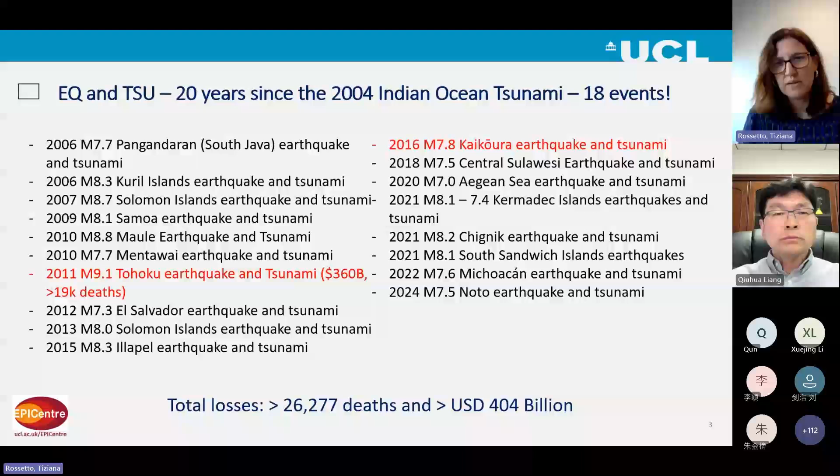So the structure of the talk today, we're going to go through some of the basics of tsunami engineering, because not a lot of people know this. So what are the tsunami actions on buildings? What is their size, their distribution? How do we analyze buildings for tsunami loads? And then exploring the relationship between earthquake damage and tsunami response. And finally, some of the implications towards both earthquake and tsunami design.

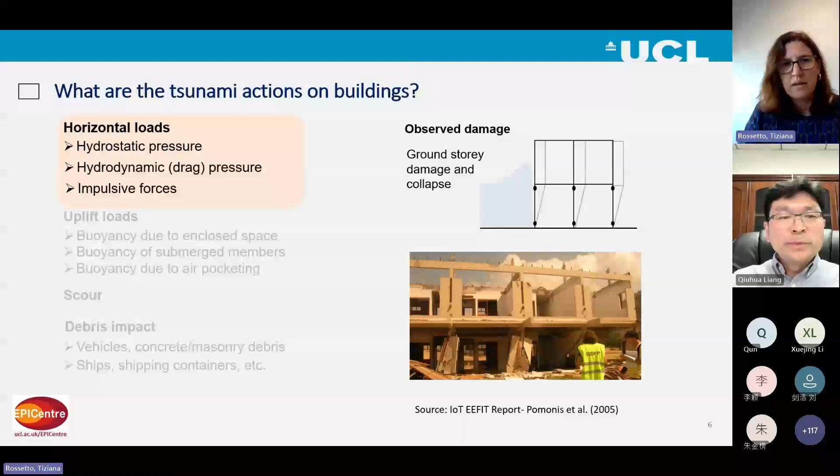So what are the actions from tsunami on buildings? We can roughly split these into 4 categories. The first category is horizontal loading. The horizontal loads are imparted when the tsunami flows pass by a structure, and these are hydrostatic pressures, hydrodynamic or drag pressures, and sometimes impulsive forces. We also get uplift forces in water, clearly due to buoyancy, and this buoyancy can be due to there being air pockets effectively within the structure. And when these form, then the structure is subjected to these upwards forces or uplift forces.

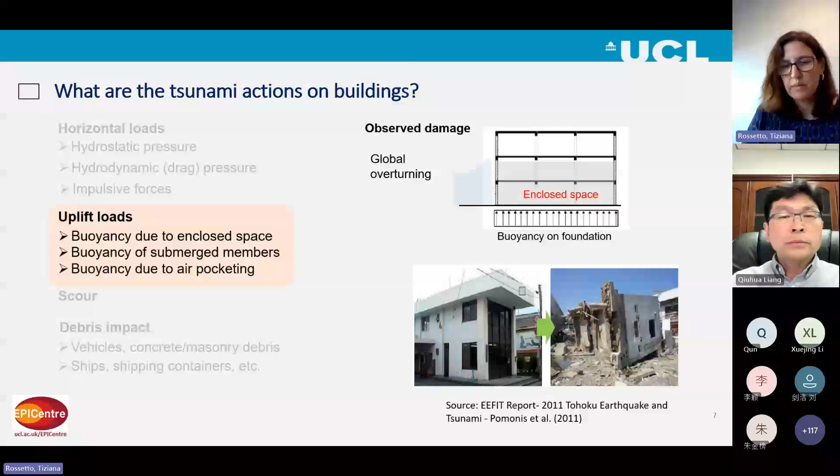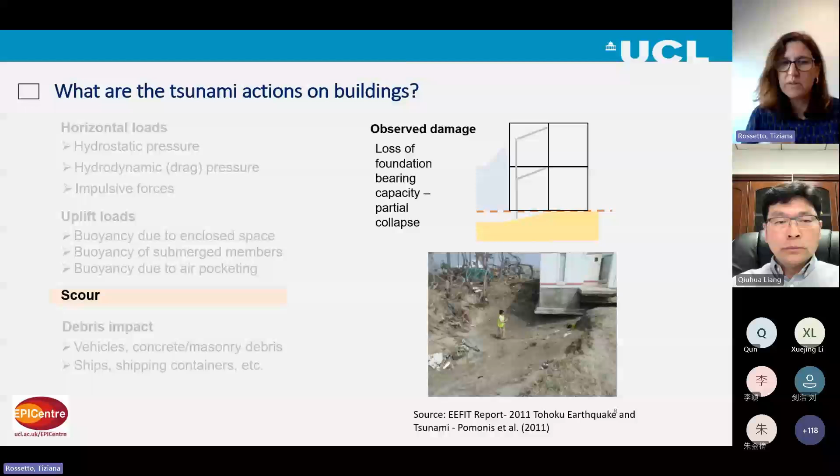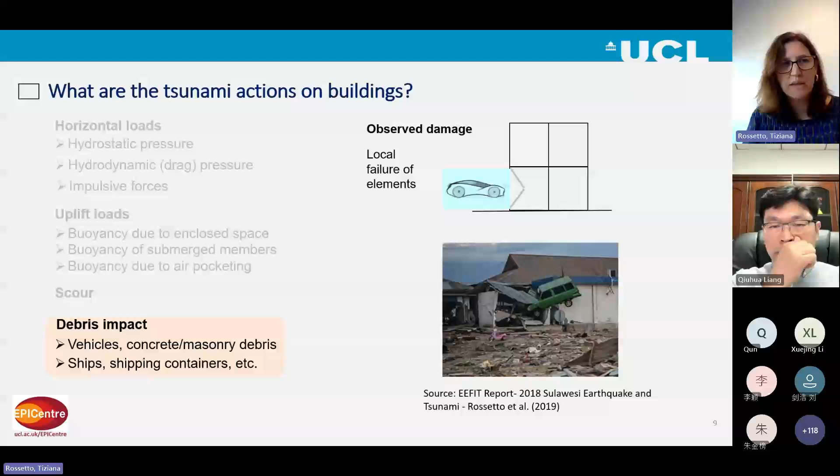In the field, post-tsunami, we often see that the corners of buildings are no longer supported by soil, and that's because that soil is scoured, entrained away by the flow, particularly around corners where you have very high velocity flows passing the structure. And finally, within a tsunami, there can be debris carried, which again can cause damage, either the damming of spaces, or large objects such as vehicles or boats hitting the structure directly. I'm not going to be talking about scour and debris impact moving forward, but I will be touching upon the other types of forces, the horizontal loading and the uplift loading coming from tsunami.

But what I found returning from the field in 2004 was that very few facilities worldwide existed for the simulation of tsunami in the lab. And those that existed didn't necessarily represent tsunami in a realistic way. So I partnered with HR Wallingford, and with them we have developed some new tsunami testing facilities and a new way of generating tsunami. And over the last 20 years, effectively, we have developed 3 testing flumes within the HR Wallingford complex where we can simulate tsunamis.

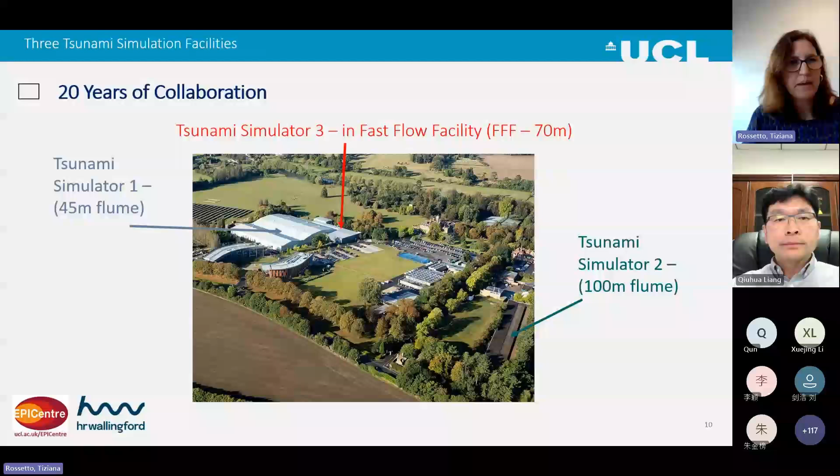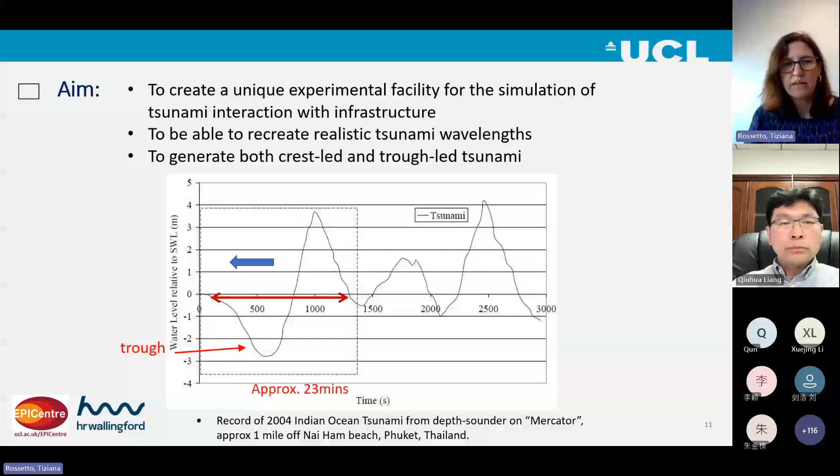But of course, as it enters the shoreline and the coastal region, that wave height can increase through shoaling. But this length, this wave period, is something that other facilities were not able to generate at the time when we started doing our physical tests. And with Wallingford, what we did was we designed a new type of tsunami simulator.

And all it is, is a glorified tank. So it's a big tank that sits at the end of a flume, and it has an air pump that pumps air out of the tank, and a control valve which allows the air to flow back into the tank. So if you close the control valve and you're pumping the air, then you are lifting the water within the tank. And as the water rises within the tank, you're creating essentially a trough outside of the tank. And then as you allow air to ingress back, so you open the valve, you allow air to ingress back into the tank, the water level lowers. And in that case, you are creating a crest.

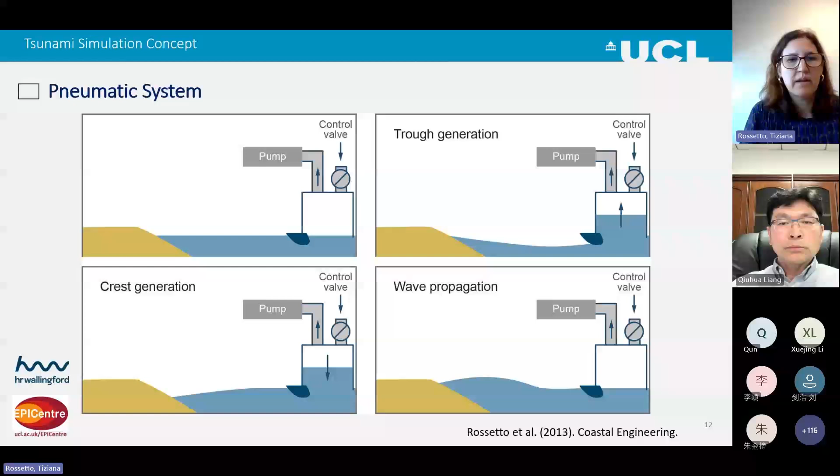And these waves that are generated flow along a flume and inundate the land. So it's a very simple system. It's basically lowering and raising the water level within the tank to essentially create and start these waves running along the flume. The flume that we're doing tests in, or the largest one that we've adopted so far, is 70 meters long and 4 meters wide. So this is a diagram because I couldn't take a picture of the entire flume itself. And on one end, you have the tsunami simulator, this tank. And on the other side, you have the test bed, essentially where we are measuring and looking at the interaction between the inundation of the tsunami flow and the structures or the defenses or other aspects.

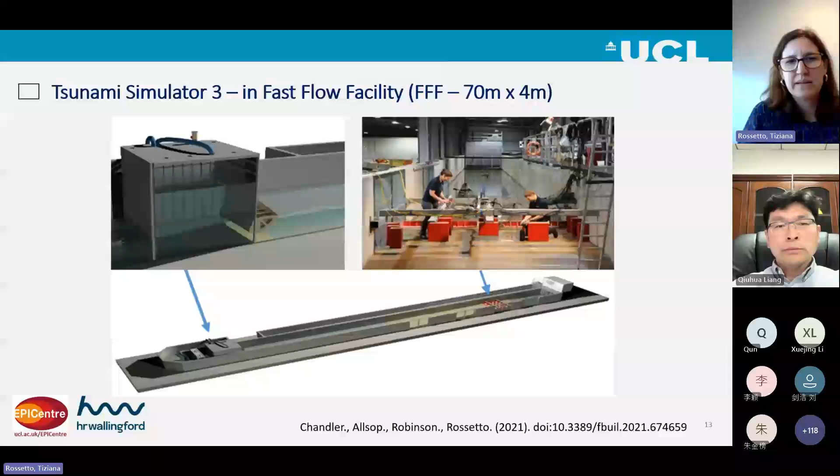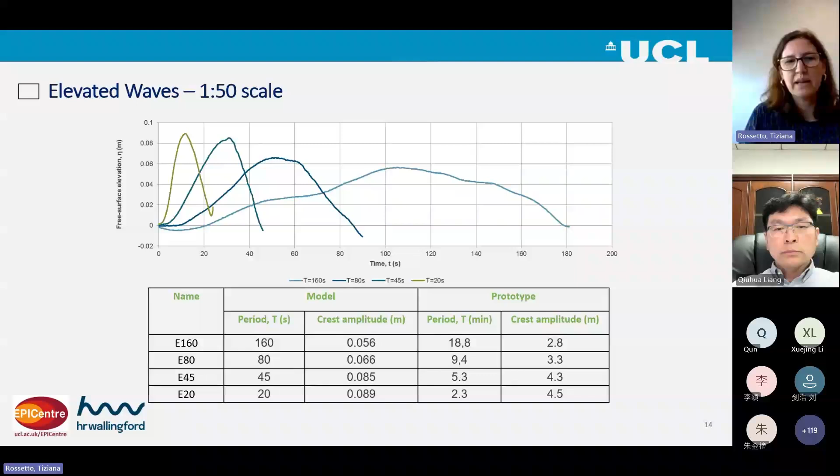And what we are able to do is generate through the system very, very long waves. So these are some images of crest-led waves. So we've only got a positive crest for the tsunami. And we can reach periods of 160 seconds in the flume model environment, which corresponds to a real tsunami of around 18.8 minutes in real life. And we're working at a scale of about 1 to 50. We are also able to generate these trough-led waves. And again, here we're actually reaching wave periods of around 240 seconds, or approximately a 28-minute tsunami, which was, if you recall, the length of the Mercator wave, which I showed you before.

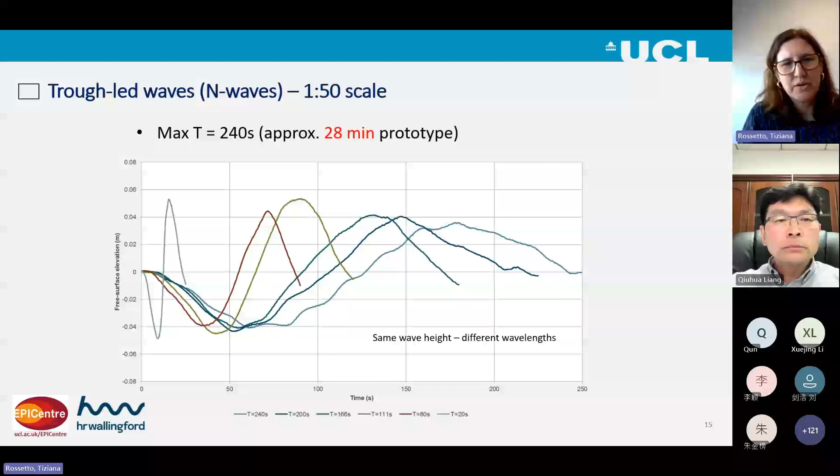We're able to accurately control the wave because we have a control system that dictates how high and low we raise the water, etc. So we've also tried to recreate real tsunami traces. So the top image shows the Mercator record that I showed you before, and how we simulated it. The red is our simulated record in the flume, and the bottom image shows you also the Tohoku tsunami trace that was measured, and our ability to simulate that. Note that there's quite a jump there in crest, etc. So we have a good control over simulating tsunamis. So tick, we solved the problem of simulating tsunamis.

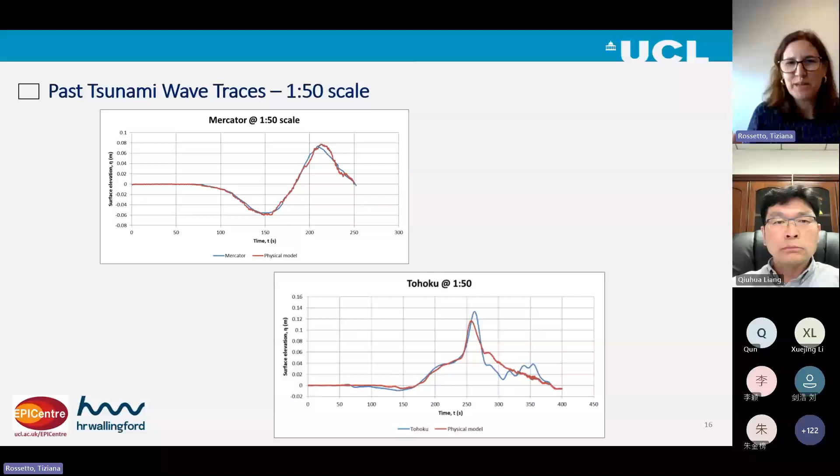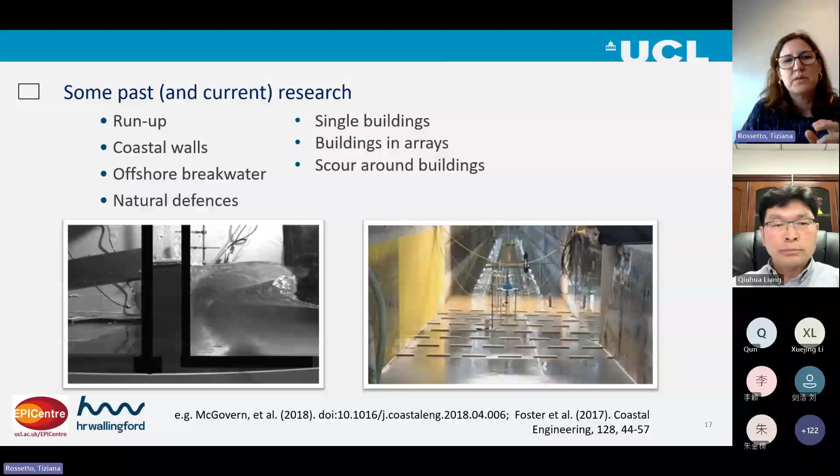What have we done with that? Well, over the years, we have essentially investigated several aspects of tsunami interaction with the coast. We've looked at run-up, which is a measure of seeing how far the tsunami goes inland. We've looked at how coastal walls can be used to react against tsunamis or defend. We've looked at natural defenses more recently, and scour around buildings, and I'd like to focus today on really some of the tests that we've been looking at on buildings themselves, because that's what has helped us understand how tsunami flows interact with the built environment.

I'm going to show, and hopefully this will work, and it won't be a total disaster. There we go. A video of some of the tests that we conducted in 2018. This is a row of buildings protected by a seawall, and the seawall breaks. The flow coming in is a tsunami of around 50 seconds in the flume. So it's not one of our longest tsunamis, but you can see that the water keeps coming and coming and coming and coming and coming.

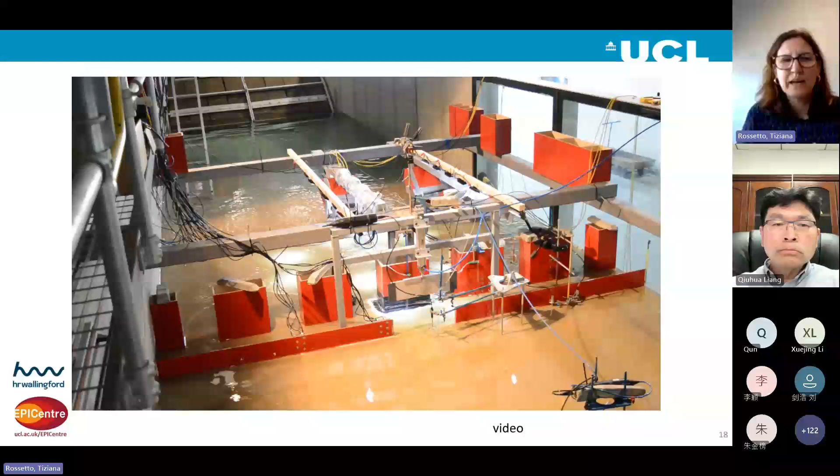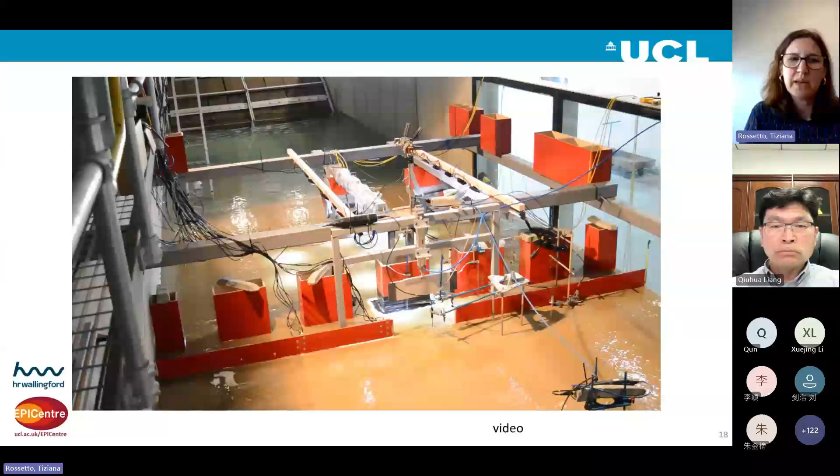And it just shows you a little bit the ability of the facility to really simulate those long period waves. You can also see there's a lot of cabling, and that is because we are monitoring the structures in different ways. We're looking at pressures, we're looking at loads, and that has given us a number of profiles of what the loading on structures looks like from tsunami.

And what we found was that actually what was assumed in the codes of practice is not actually what we recorded. So in the codes of practice, the assumption is that the tsunami wave arrives at the structure, it hits the structure, causing a large impulsive load, okay? And then as the flow sort of stabilizes around the structure, you have a quasi-steady component or pressure that is acting, that slowly goes away as the flow passes the structure. In our tests, we don't see the impact at all. We don't see that massive spike at the beginning, but rather we see a bit more of a gentle rise and lowering of the forces.

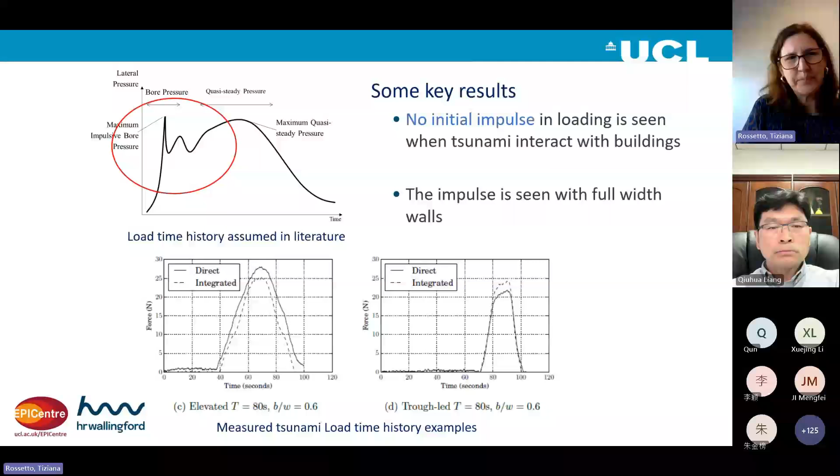And this is because the assumption made with this big impact force is an assumption that comes from looking at flows interacting with walls that are full width. Okay, so they fully stop the flow. So you get this initial impact because the flow is stopped fully. However, structures, buildings don't stop the flow completely. The flow tends to flow around, and particularly as the tsunami is a slow rising flow, I mean, it's fast, but it's almost quasi-steady, then you don't see that impact, but rather the water passes by the structure or is able to go past it. And we've used some mathematics to basically show that actually the tsunami flow around a building are quasi-steady.

And we've developed, to go with that, some very simplistic relationships for predicting what the forces from tsunami flows are on a structure, where we take into account the blockage ratio of the buildings, which is essentially the urban density. So how much does a building block the flow? And we also take into account a drag coefficient, which is a typical thing you would have within any flow around an object type of analysis, and the Froude number. And with these three parameters, we can basically estimate for any height and velocity what the forces are going to be on the structure. So we've tried to develop an engineering type of tool, a simple calculation that can be used for estimating the forces.

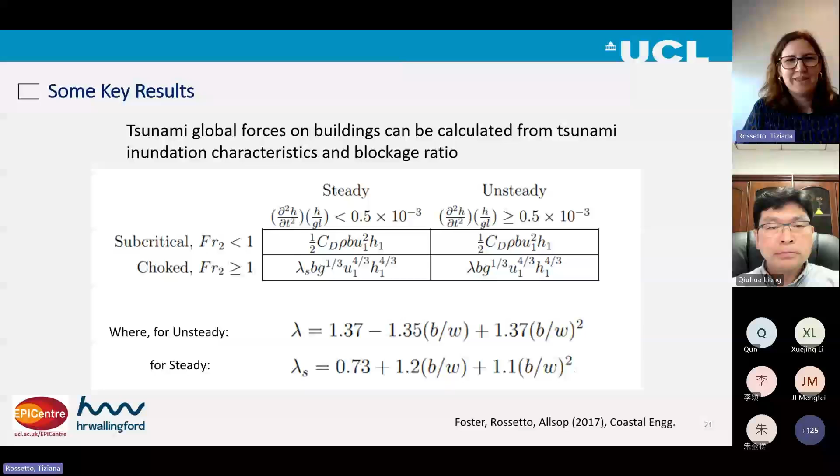So great, we now have some forces. Okay, so how do we apply them to a building? And how will a building respond to these loads? Okay, so that's another area that we have been working on a lot. And I just want to start to show you this figure.

Because what was expected at the time when I started working on tsunami engineering was, again, this idea that a tsunami loading was similar to the loading from an earthquake. Now, the loading from an earthquake is fast, it's cyclic, there are lots of cycles, and essentially the cycles are of large strength only over a very, very short amount of time, right? So each cycle is high frequency, so has a very low time of impact, essentially. Tsunami is totally different. A tsunami is a quasi-steady, long duration flow.

And so the concept of ductility that's used within earthquake engineering to resist earthquake loads cannot be used within a tsunami. So essentially what happens is the tsunami arrives at the structure and it pushes the structure and it continues to push the structure and it pushes and pushes. And when the structure yields, it continues to push. So the structure yields and it basically then collapses. And what we found mathematically is that once the structure is yielded under a tsunami, effectively, because the flow continues to push it, you get collapse straight away. And you cannot rely on the non-linear capacity, so that deformation capacity that we do in earthquake engineering, because once it's yielded, it's gone.

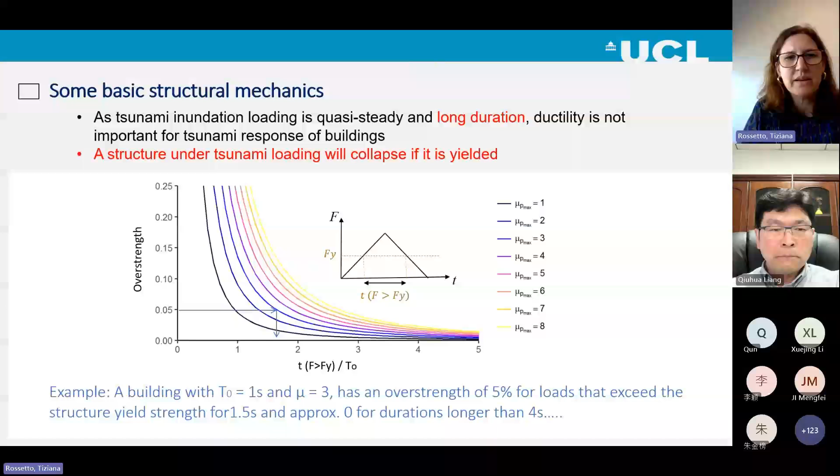In tsunami, what we did is we reversed the concept. So we started at the base and we said, okay, the flow starts at the bottom and rises. But essentially, if we think of it as a hydrostatic type of loading or similar, then we have a very similar sort of triangular distribution that we apply, but it starts at the bottom and rises up. The nature of these forces is that actually it induces a large shear at the base of the building and not the large moment that the earthquake does. And this is a key concept. So the response that we get under tsunami loading and earthquake loading is very different.

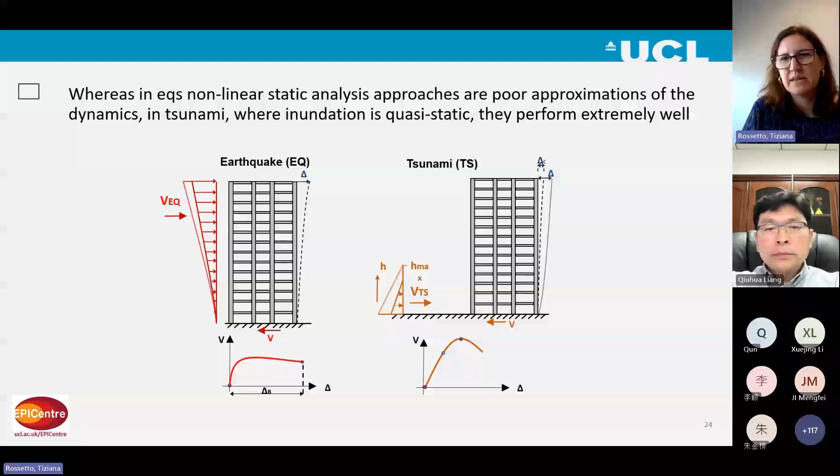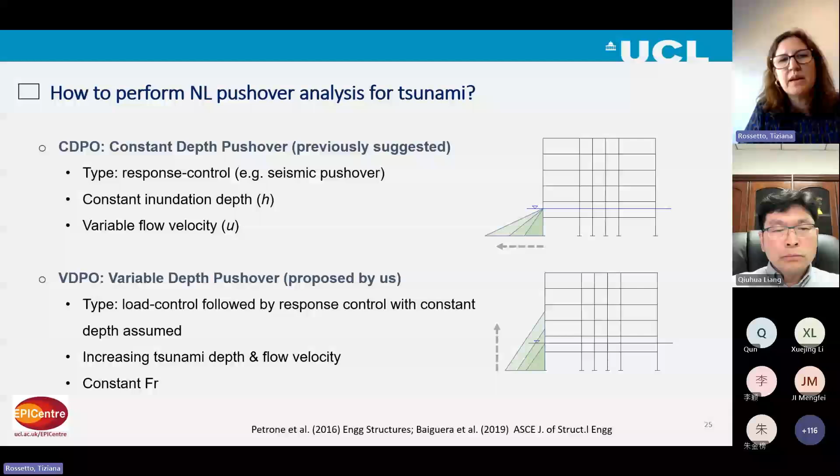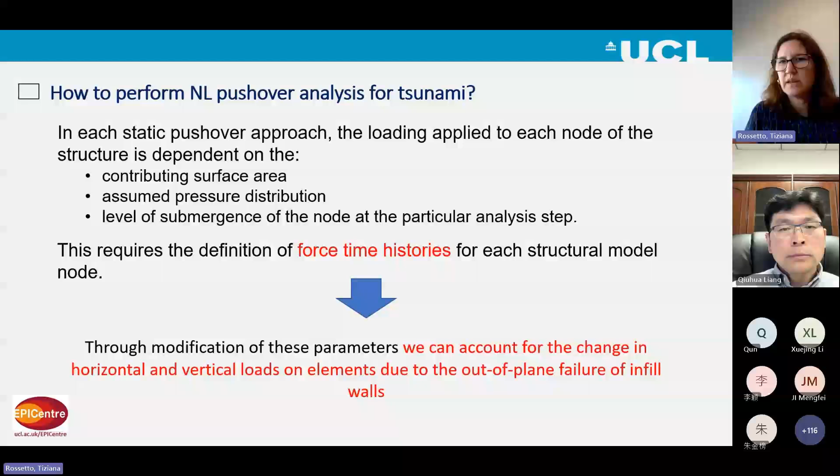We had to look at how do we apply the loading to the structure, because it's not simple. As you're raising the loads, you are activating new nodes. So you are applying forces to new nodes that didn't have any force applied to them earlier in the structure. So we discretize the load such that at each node you have a time history of forces. And the nodes that are higher up in the structure have zero force to start with, and then they start to attract forces. By having time histories of loading and discretizing the loads in this way, it means we can actually start to activate different nodes as they get inundated, both for horizontal loading, but also for vertical loading. So we can take into account the effects of buoyancy.

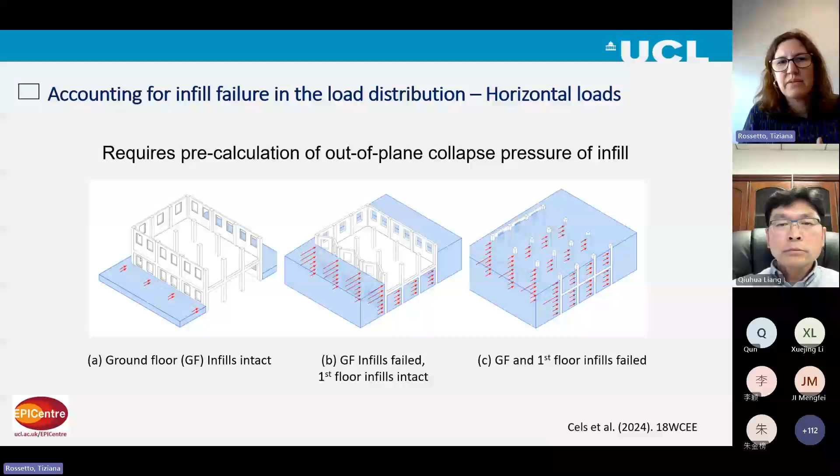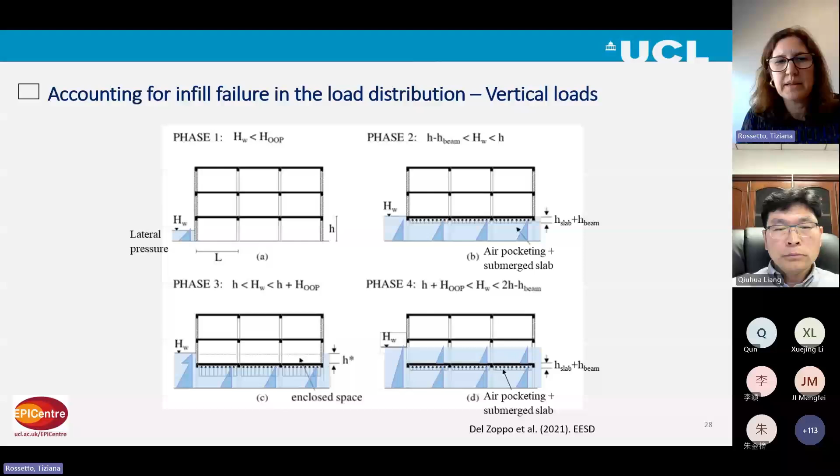If you look at the case of B, what we find is if the infill is still intact on the second story of the structure, while the bottom is inundated, you have now a big air void and very large vertical forces that are acting because you've got an air void engulfed in water, essentially. And until those top story infills collapse, then you're not releasing that vertical load. So we can take into account effectively the change of loading in the structure. So this is just another diagram to show how, particularly in the case C here, you have an enclosed air void, which causes very large buoyancy forces on the slab of the first story. And when you've got the collapse of the infill on the first story, then that buoyancy load basically disappears, and you get water flowing above as well.

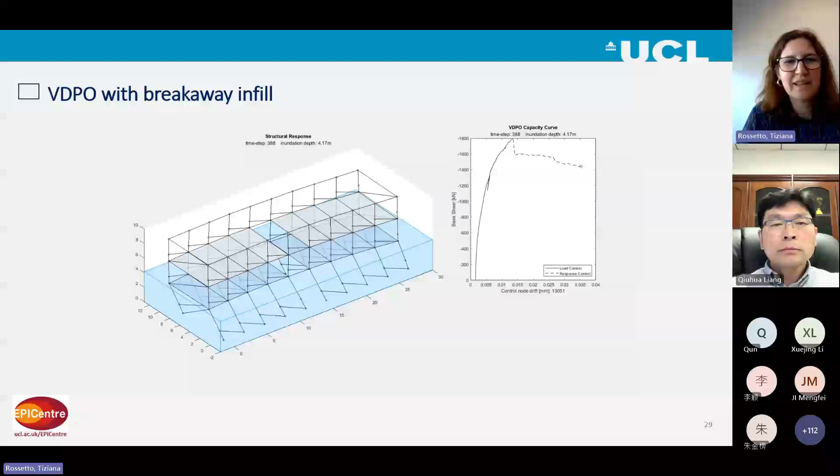This is just an animation of a simulation that shows you how a structure, and this is an infilled structure, a reinforced concrete structure, responds to a tsunami. And if I can set it going, what you can see is the water level is increasing. As that water level is increasing, the base shear on the structure increases. But you also have a point at which you have a drop. So if you see halfway up the curve, you get a drop and then a pickup again of force. That drop is the collapse of the infill, essentially, that is releasing loads and reducing loads on the structure. So it then continues to carry loading up to a certain level and then fails. You get this sort of abrupt drop in strength, and the structure continues to essentially lean over until it's failed completely.

What can we take from here? And sorry, I might have lost you on the way. I hope not, but let's summarize a little bit. Firstly, that non-structural elements are really important. So the infill walls, because of their large area, they attract a large loading from the tsunami flows. And so ignoring them is unconservative.

So we have to take into account the fact that there are walls that may attract loading, and because they attract loading, then pass that to the main structural elements. Because if we don't do that, then we're underestimating the loads. But it's also too conservative to not consider the fact that they may fail during the flow. And if they fail, they're releasing the loading and reducing the loading on the structure.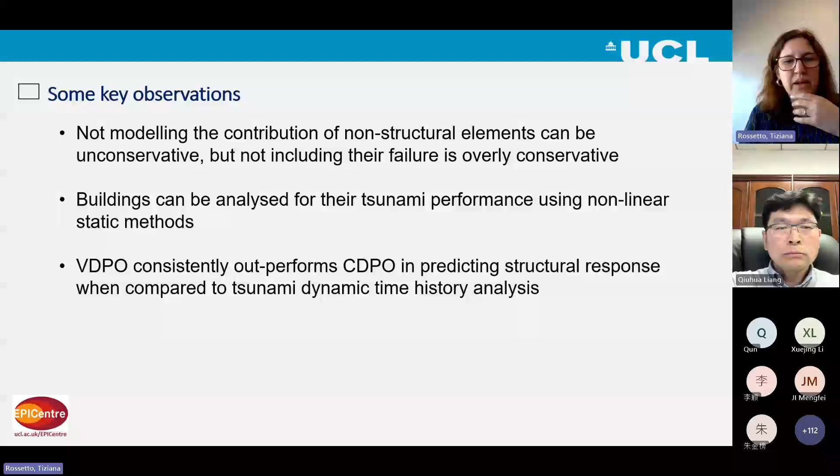We can use nonlinear static methods to analyze tsunami performance, and we can do that very well. And we can use something we call the variable depth pushover very well to do that. And this is an approach that we've developed and is now fully available. And another observation is the fact that if we use nonlinear static, this pushover approach for earthquake and tsunami, we get a very different response of the building.

So I mentioned initially having an earthquake pushover imparts a large moment at the base of the structure, okay? And that results in a lower base shear capacity of the structure, lower capacity to take horizontal loads, but the structure can deform quite a lot. In the case of tsunami, because the loads start at the base, they are eliciting a different response in the structure, much stiffer response, okay, and a much stronger response. So the structure is actually stronger under tsunami loads than it is under earthquake loads, but it is also not ductile. It can't take those large deformations.

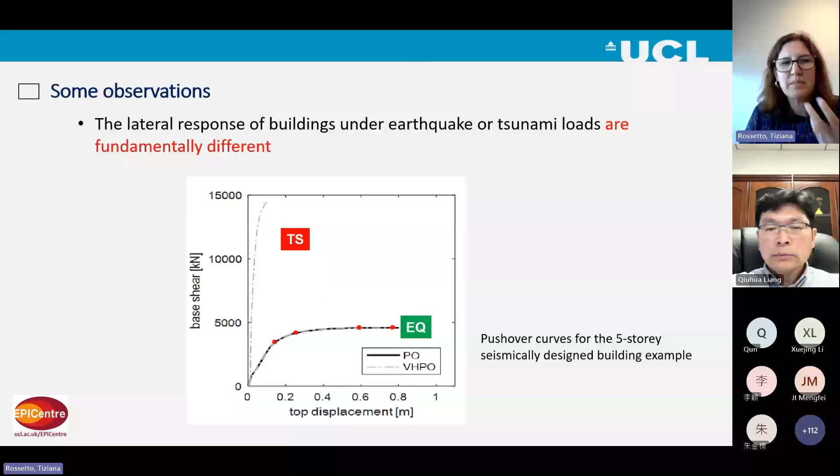Why is that? They're both horizontal forces. Well, effectively, they're quite different. They're fundamentally different forces in how they apply to the structure. So if we take into account this example with New Zealand football players, basically, a tsunami is on the left. It attacks the legs of the building. It attacks the legs of the structure. Okay, it attacks it right from the bottom, and it tends to basically unseat those legs. You know, it swipes the legs off their base. The earthquake instead attacks the top of the building. It tends to try and rotate the person, so it'll try and topple them over. Okay, so if we take that example, you can see that they're fundamentally different.

And the way that you are resisting those forces as a person is different. So the structure also is doing that. So we're looking at two quite different forces, both horizontal loads, but acting in a different way on the structure, on those bodies.

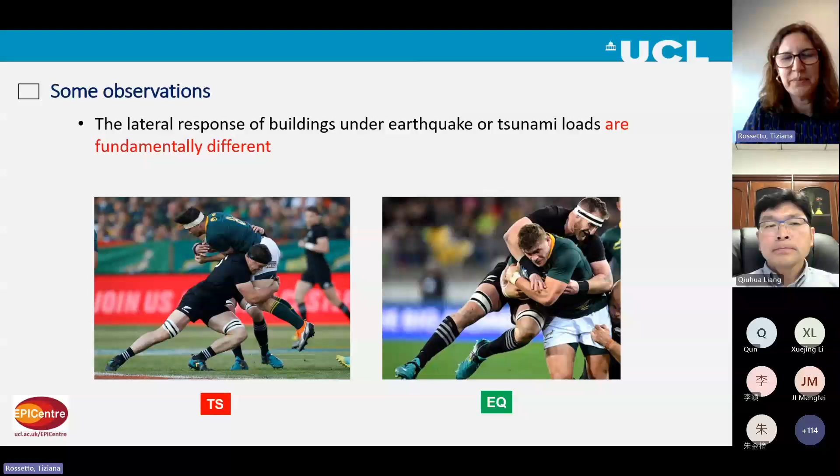So in tsunami engineering, we've been really blessed by new codes of practice that have come into play for looking at tsunami actions and how to design for tsunamis. And one of the most well-known or most well-used is the ASCE 7 standard, which Chapter 6 contains the tsunami assessment or analysis code. And you don't have to know a lot about this, but what I wanted to show you is how thinking has evolved.

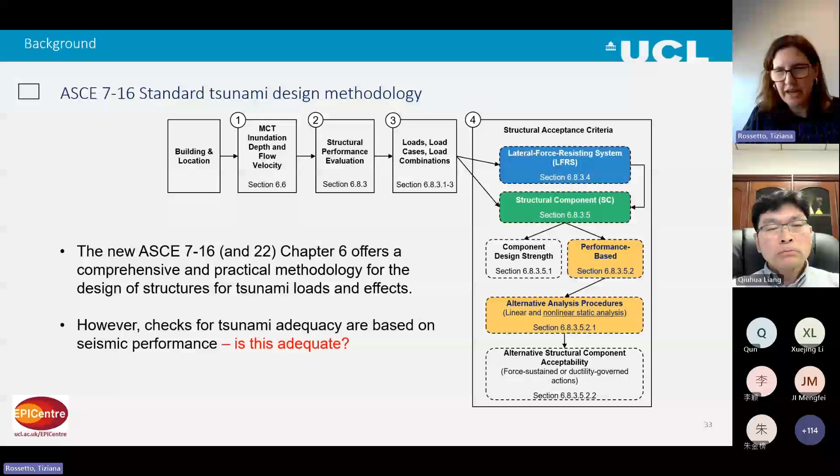The ASCE 7-16 started with the first check that it conducts is to say, well, take your earthquake resistance, your pushover analysis from your earthquake analysis of a structure. And it's this curve that you see at the bottom here, similar to the ones I've shown you before. Take its maximum strength, okay, reduce that to 0.75, add a safety factor on top of that. So we can basically assess, we say, well, if we take that pushover, then we have a sort of a maximum strength that the structure could potentially achieve with all overstrength considered. And basically, if the tsunami loading is less than this value, this 0.75 times 3 times the base shear at design, then you don't have to conduct any further analysis. You're okay for tsunami. Okay, so that's the check.

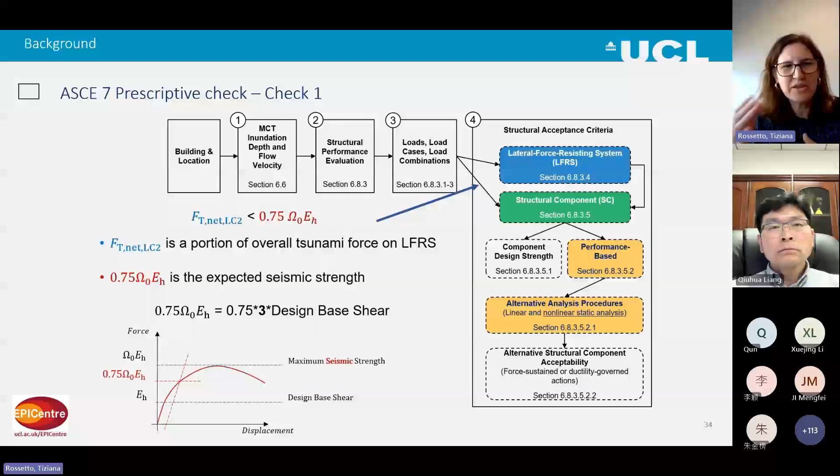So the check in the Code of Practice in 2016 was take the earthquake response and do a few calculations and then compare that to the tsunami loading that would be applied. But as we've mentioned before, the earthquake response is not the tsunami response of a structure. So in this diagram, I show you the earthquake response of this particular building. We're looking at a building which was actually a 5-story structure built to Japanese seismic code. And the structure here has an earthquake response shown by the gray curve at the bottom. Okay, that's its design response. If we apply the factors, you get to this gray line here, 0.75 omega EH over 2.

Okay, the applied tsunami loading on the structure is higher. It's this black dashed line. According to this check in the Code of Practice, the structure would fail. So you would have to redesign the structure, and what they've told you to do is to basically enhance the seismic design, make it even seismically stronger.

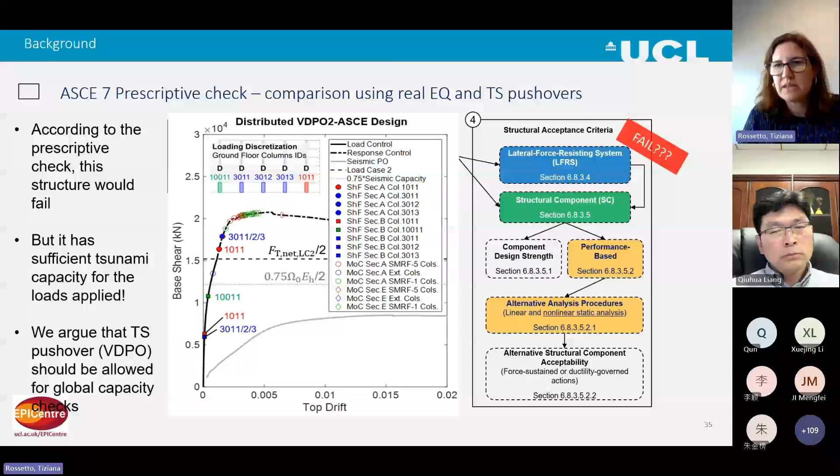But actually, if we look at a real structural response under a tsunami analysis, we see that the tsunami capacity is much higher than the applied tsunami forces. So if we conduct this nonlinear static analysis, the variable depth pushover, we actually see that the structure can resist the tsunami loading. So it would pass, essentially, this first check.

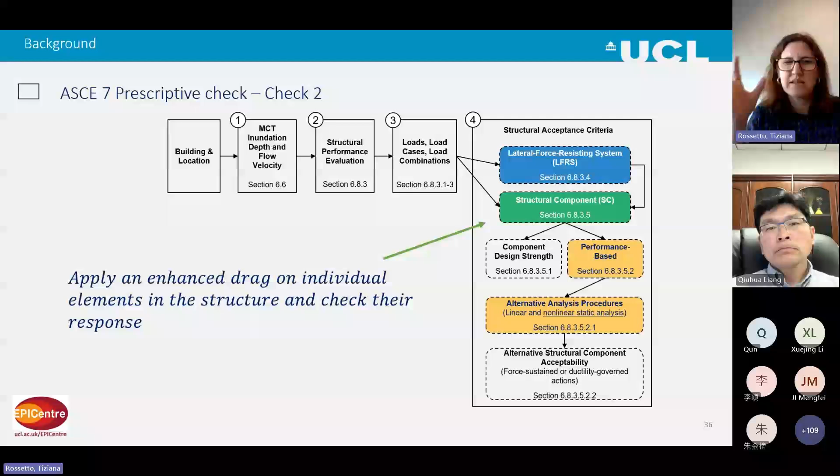The ASCE code then goes on to say, well, the loading on individual elements can be higher than just a normal distribution. We can have enhanced drag on individual elements. So you need to check the structural components as well, not just the structure as a whole, but also the individual components. And if we look at our structure that we're analyzing here under the tsunami pushover curve, it would fail these

checks. We are having some elements here, 1011, 3011/2/3, etc., that are failing in shear, and they're failing before we reach the dashed line of the tsunami force, which is at sort of this 1.5 value. So yes, the structure would actually fail when we're looking at the component checks.

But what this VDPO analysis gives you is it tells you which elements are failing. And so it provides you a way of redesigning just those elements rather than designing the entire structure from scratch. So we find that by using this tsunami pushover analysis, you can come up with a less expensive design and a more appropriate design of the structure. So you can design your structure and take into account exactly where the failures would be from a tsunami loading.

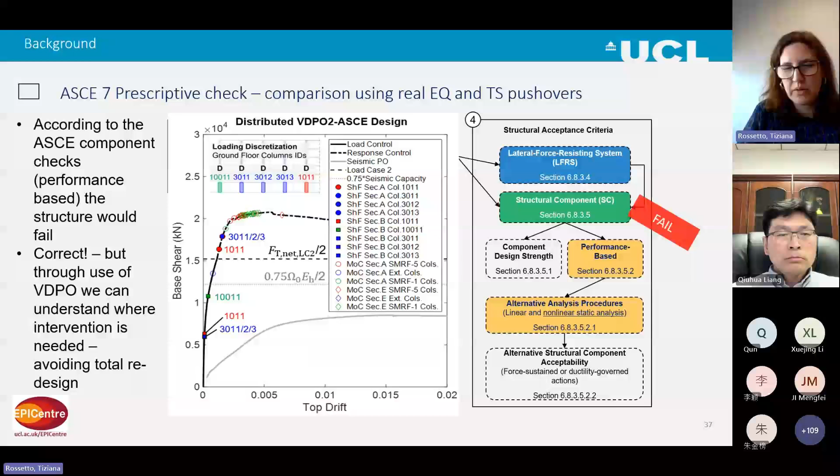And we have developed a version of the VDPO that is compatible now with the ASCE 7-22 version and is referenced in that code and available on commercial software. And we're making it also available for researchers.

So again, we need to really embrace the fact that tsunami analysis and tsunami responsive buildings is different from earthquake responsive buildings. And one of the things that we found consistently in some of the case studies that we've been running is the fact that even seismically designed buildings fail in shear. Now, shear is something that in seismic design, we design out. So we assume it never happens. But actually here we're getting a precipitated failure through the shear failure of columns at the base of the structure.

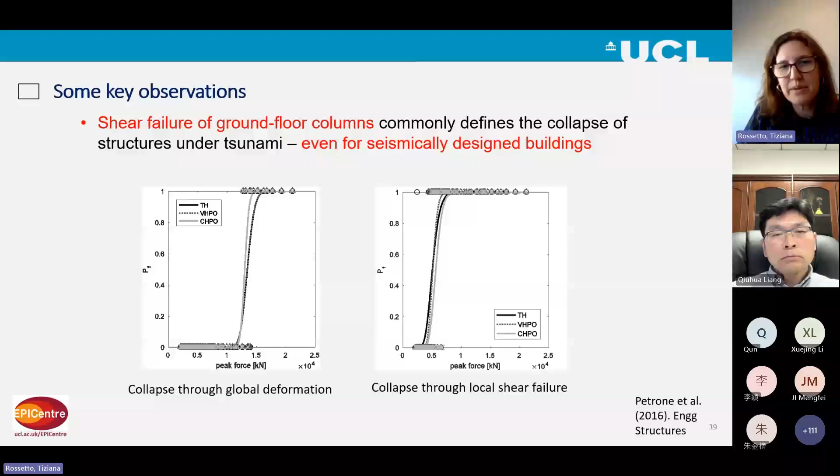So if we look at collapse through global deformation shown by this fragility function, again, this was a 10-story reinforced concrete building. If we ignore shear failure, we get a peak tsunami force of about 1.2 kilonewtons times 10 to the power of 4. Whereas if we consider the collapse triggered by shear failure of the columns, we see that that's reduced to about 0.5. So the shear failure of columns in the ground story is a big issue. And this, in theory, shouldn't happen in seismic design, okay? But it does happen because the loading is different. So really continue to think about that difference in loading conditions.

And let's extend this one step further. What happens if you have an earthquake and then a tsunami? So far we've looked at earthquakes separately from tsunami, but these things happen in sequence in many locations like Indonesia. So what happens if you have first the earthquake ground shaking and then you have the tsunami?

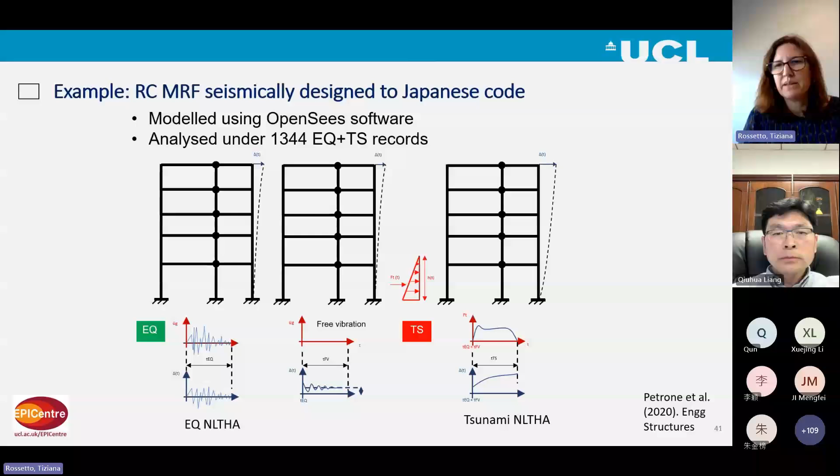We ran a number of different analyses on seismically designed structures, where we ran first some earthquake ground motions, allowed the structure to come to a rest, and then we ran a tsunami pushover analysis. The idea was to test these structures under different levels of damage caused by the earthquake and then see how they would respond under a tsunami. So if the earthquake took it to damage state 1, what would be the tsunami capacity, and so on. Damage state 2, damage state 3.

Okay, and that seems contrary to what you would think. Okay, and I'll explain this a little bit further. But from our analysis, it looks like pre-earthquake damage essentially has no effect on the collapse probability under tsunami loading.

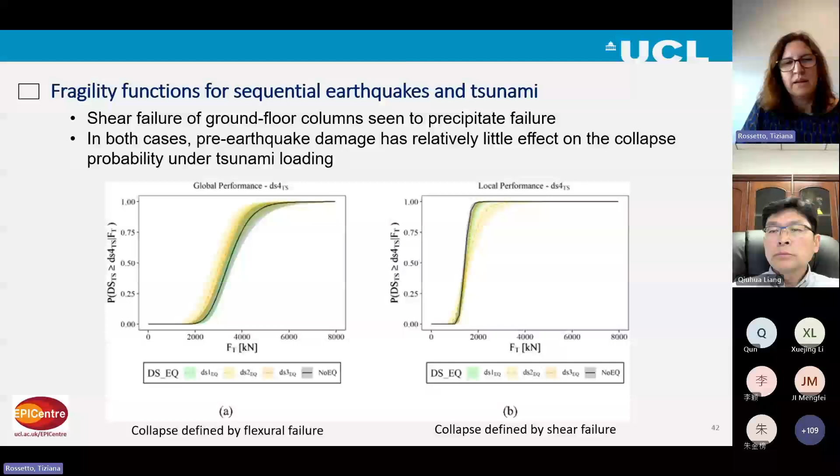Here is where I found a lot of resistance from my colleagues who go out in the field and, like myself, look at damage after tsunami. And it's important to consider that in places, for example, like the Tohoku earthquake and tsunami, the damage that is reported is a combination of earthquake and tsunami damage at the end. There is no separate analysis in the inundation area of the earthquake damage before the tsunami happened. It's a combination of the two things.

And if instead we look at the collapse, damage state 4, we see that predominantly it's in areas that were affected by very large tsunami inundation. And it doesn't matter what the earthquake forces were, but it's very large tsunami inundation. So if you actually look in detail at these, you can see that this is the case, because remember what I said before, when your structure yields under the tsunami loading, it will collapse. That basically is saying that until the structure yields, the tsunami hasn't got an effect. The structure will go back to its original position, will be elastic, and will have no damage from the tsunami. It will have non-structural damage, but nothing to the structure.

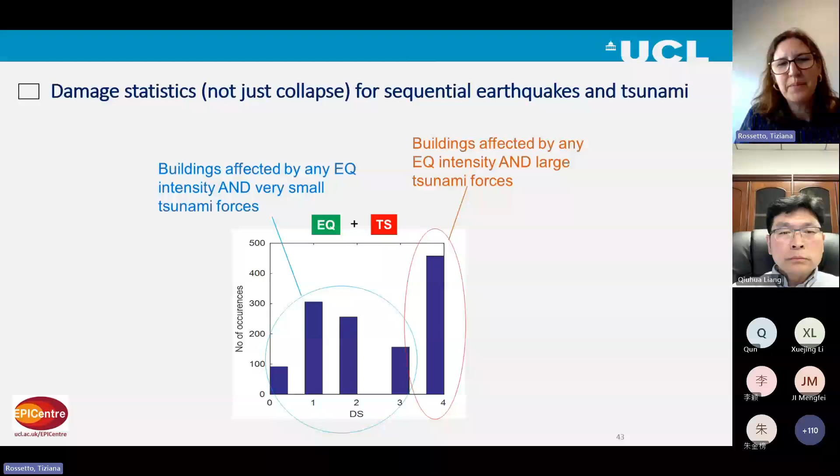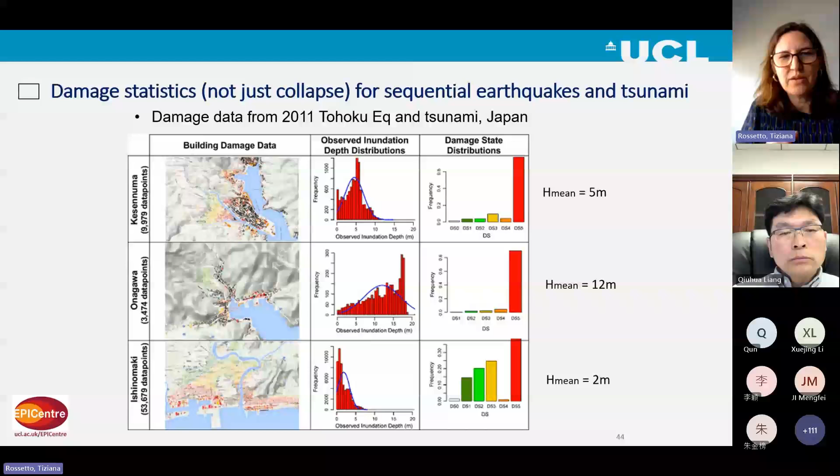And we see that reflected also in different locations. And you can see that where you have a low tsunami height, so the 2 meters at the bottom, you see a distribution in the damage. So you can see that the earthquake, which shook the ground, was quite large and caused a distribution of damage. And then, of course, you've got the peak also from the tsunami. But in areas where you have high tsunami height and low earthquake shaking, you actually have the tsunami dominating the response. It's causing the collapse. So it's not a perfect analysis of the data, but when you start looking at it from this perspective, it does show that the tsunami and the earthquake are affecting the buildings differently.

So key observations is that the quasi-steady nature of the tsunami loading means that the collapse occurrence is determined by the strength of the building under the tsunami loading, which is a different strength than under the earthquake loading. It's a higher strength. Once the building yields under the tsunami, it will collapse because of the duration of the loading, because the tsunami keeps flowing and flowing. But if it doesn't yield, then the damage from the earthquake is the one that actually dominates the overall damage state. So it's almost like you can analyze the structure under earthquake and tsunami separately and take the worst case of the two.

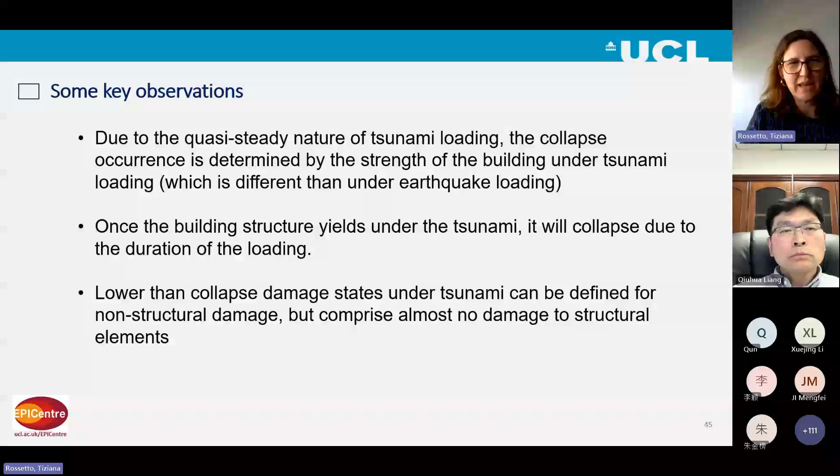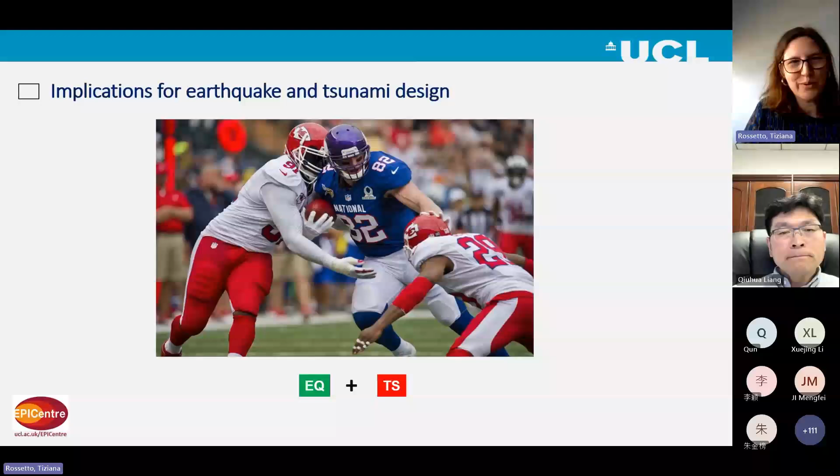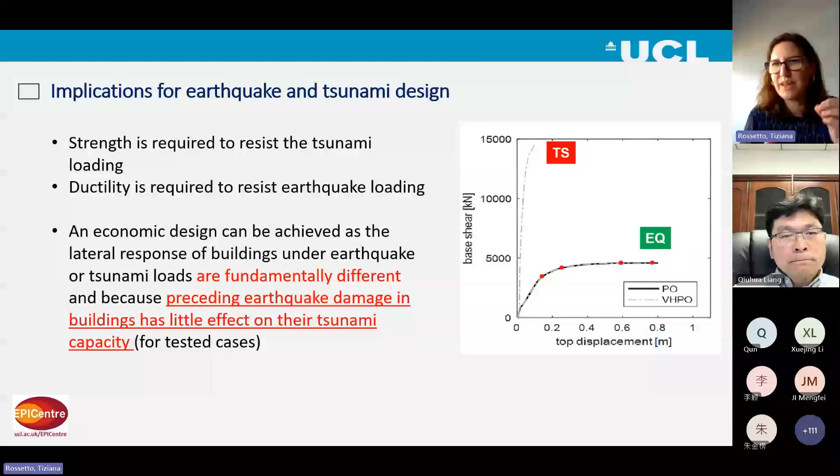So how do we do that? Luckily, there's a way. And the way comes specifically because the response of the building to tsunamis and earthquakes is different. So you need strength in the structure to resist the tsunami, and you need ductility, that flexibility in the structure, to resist the earthquake loading. But you can achieve with the same design a very high tsunami strength and a very ductile earthquake response because of the forces and how they act are different.

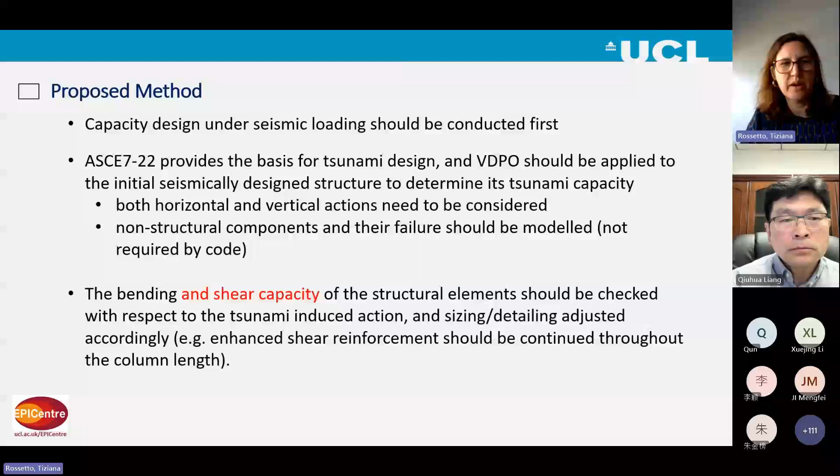So what would I do to design a structure for both earthquakes and tsunami? Well, this would be my proposed method. I would go through the classic earthquake design to start with. I take my structure, design it for my seismic loading with the full capacity design. And then I would use the ASCE 7-22 code, and take the first initial seismic design of my structure, subject it to my tsunami loading, both vertical and horizontal, using a nonlinear static analysis, and check the response in that case. Most likely, the overall response of the system will be fine, but there may be issues with particular elements, things like the columns of the ground story. So I would strengthen those to meet the tsunami design requirement. And you just check bending and shear capacity of all the elements to make sure that that's fine. And hopefully that would give us an economic design.

On top of that, I would start to think about other aspects that I could take into account in my design choice to start with, such that I can actually reduce loading from both cases. So one of the things I can do is, for example, separate infill panels from the surrounding frames and have weaker infills, so that they can be blown out by the tsunami, but that's also useful in having a good response under earthquake situations. If I needed lateral restraint, if I needed a stiffer structure, I might choose bracing over walls because bracing allows water through. So the bracing will be good under earthquake conditions, but will allow water to go through under tsunami loading.

I would potentially use shallower beams so that they don't trap the air underneath them. And this can work within the context of capacity design for earthquakes, where we're designing our beams to be weaker than our columns. I might even design blowout slabs, to allow the slabs to lift up in the case of a tsunami loading that has high buoyancy loads. I'd make sure that there's redundancy in some of the vertical load carrying elements, so that if there was debris impact from something floating in the tsunami flow, then I would avoid progressive collapse. And most likely look at also implementing deeper foundations and ring beam foundations to resist scour effects. So these are some of my ideas of what I would do to look at both earthquake and tsunami design.

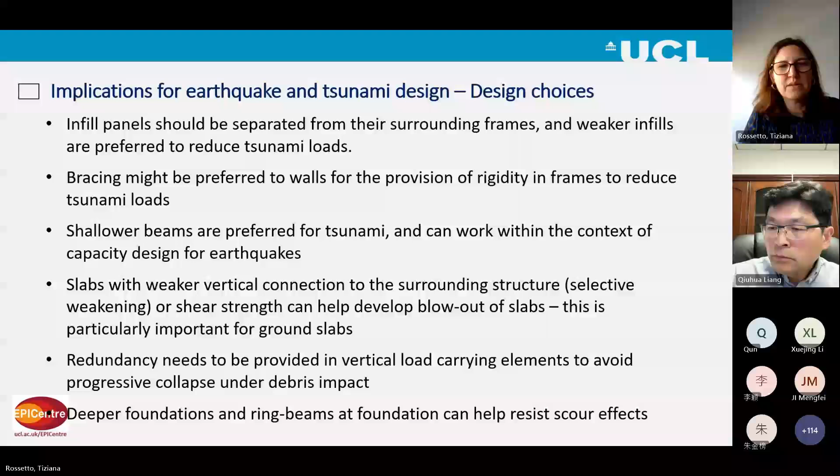And you'll be happy to hear that that's coming to the end of my talk. I still think there's a lot to do. There are significant limitations with the work that I've presented. We're looking only at certain case studies. We're ignoring some other parts of the tsunami loading, like scour and debris. But globally, we also need to be able to predict how big our tsunamis are going to be. And there is a lack worldwide of tsunami hazard maps. And that is something that I think is a gap that we should be trying to fill as a community.

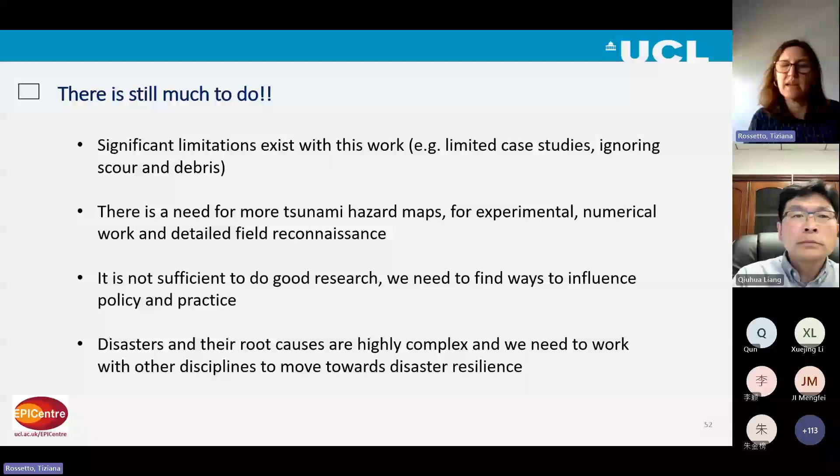We need to not only conduct research, but actually influence policy and get some of this stuff into practice, into codes of practice, etc. And we need to be able to work with other disciplines to move this forward. I would not have been able to do this work without collaboration with a whole number of different people, including coastal engineers, fluid mechanicians, earth scientists, social scientists, etc. So I do really believe in this multidisciplinary approach.